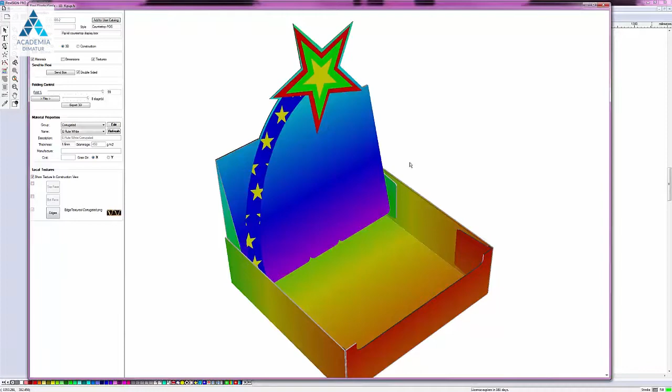This tutorial is about making flip-ups, which are a common feature of point-of-sale boxes. This is a typical flip-up here. It's a piece cut out of an adjacent section which doesn't fold down but remains pointing up. So the question is, how do you make such a thing?

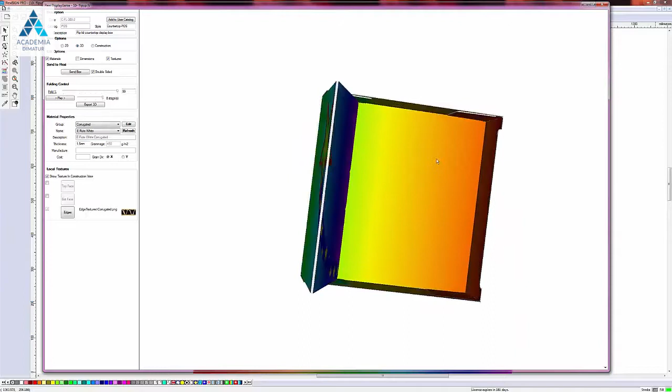Here we see the illustrated flip-up box in construction view. If I look at it in 3D, we see that this is a normal fold line and the flip-up, unfortunately, is hidden on the back of the box. So to fix that, we go back to construction view and we add to this section, which is sort of the base of the flip-up, a machine step perforation.

Flip-ups are made by starting with a perforation machine step. Now, this machine step has to have its two ends on the fold line, which we wish to have a section of not fold. So the idea here is presently this entire line folds, but we only want this lower section down here and this little bit up here to fold, and the rest should just stay unfolded.

So we begin the perforation machine step here and add a few points. Okay. We can always drag the points if we don't like where they are exactly. So now I have to make sure to end it on the fold line again. And now I want to get out of create machine step.

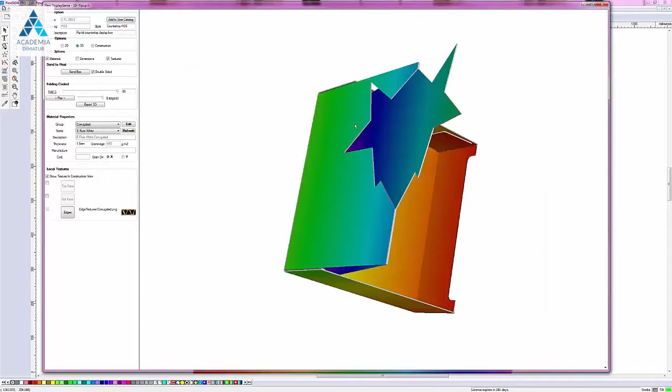Okay, now this point needs to be adjusted a little, and this one, drag point. Okay, that's a bit prettier. Now, if I go into a 3D view, we find that we have a flip up.

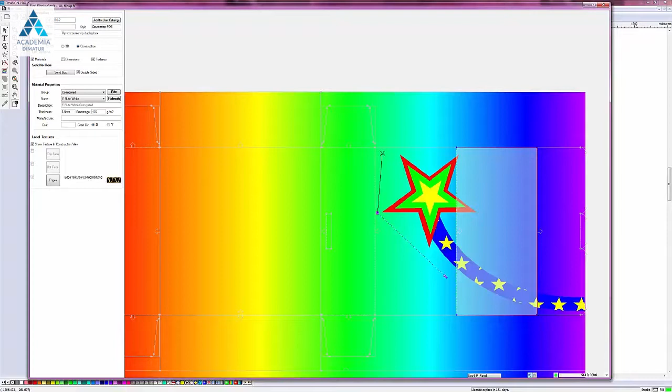We'll now show some of the things which can go wrong with making a flip up. Supposing that I want to add a flip up to this section as before, add a perforation, and I don't start very close to the fold line. Now that's about close enough. But this first one I think is far enough away to annoy it. So if I say convert to flip up, I have an error, which is start point is not on fold line.

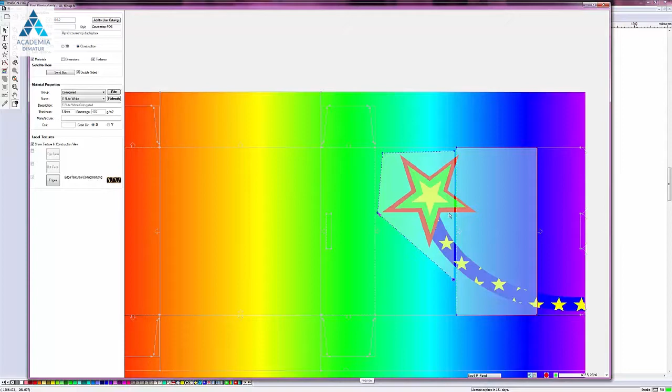Okay, so I can bring this point down a bit, and I don't have to get terribly close because it will automatically drop the two endpoints onto the fold line. Let's just try that again. So we're going machine step, convert to flip up, and still not satisfied. In that case, I can just zoom out a bit. Okay, so machine step, convert to flip up, and there it works okay.

Another thing which I can do wrong when making a flip up is to try and select this section and then draw the perforation in it. So if I say perforation, and now I'm making my flip up as before. Now, unfortunately, I've made a fatal mistake, which is that I've drawn the perforation inside the section border. There's a fundamental rule, which is that the perforation must always be outside the border of the current section.

So if I try and make a flip up now, I'll get this error message, which is fold machine step is bad. This means that the fold line I've drawn my perforation machine step on is not a good one, and the reason is that it doesn't actually belong to this section in which the perforation lives.

So basically I'm trying to make a flip up which sort of folds back on itself here, and that's not the way you do it. I must instead put the perforation in this section. So let's just do the right thing and start here. Machine step, perforation. Okay, and now we're seeing that we've increased the fill area rather than sort of doubling back.

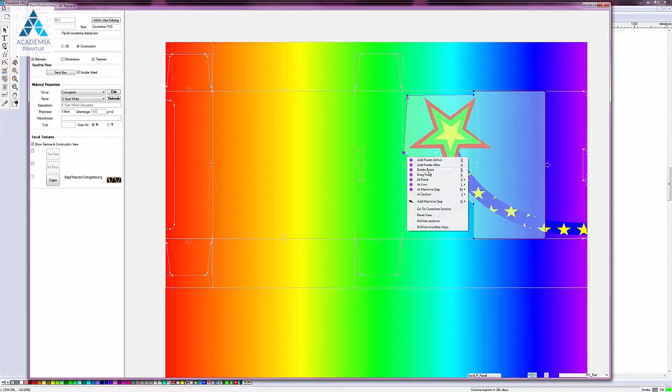So that's the recipe for making a successful flip up, like so. Machine step, convert to flip up. And now when we go to 3D, you should see this new flip up.